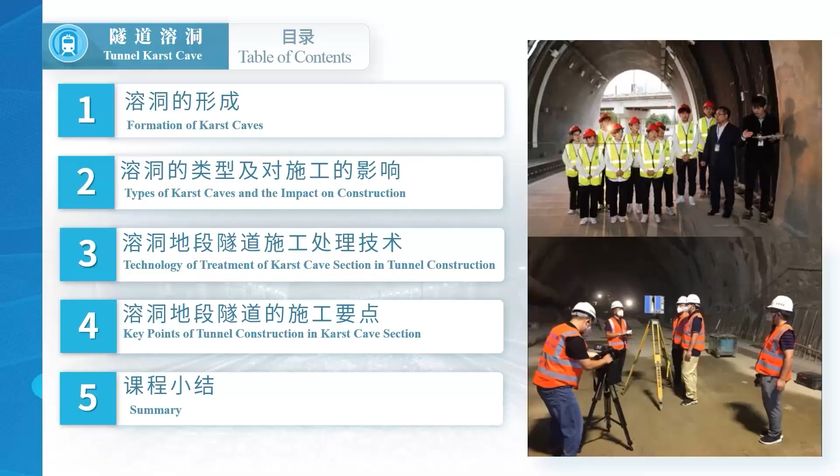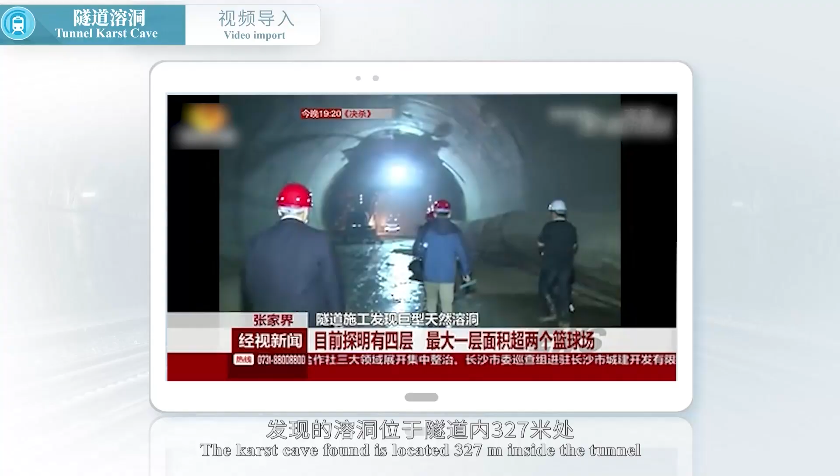A few days ago, on the Zhangjiajie-Sangzhi Expressway in Zhangjiajie City, a natural giant karst cave was found during the construction of the Huangxiangwan Tunnel in the Sangzhi section. Four layers have been proved so far, the largest of which is larger than 2 basketball courts. At present, the construction of the left tunnel has been suspended for an all-round survey. The karst cave found is located 327 m inside the tunnel, between the left and right tunnels.

When the reporter passed through the narrow mouth and reached the first layer of the karst cave, in the company of construction team workers, it seemed that they entered a large auditorium. The rock walls around are covered with large and small stalactites, most of which are covered with a layer of soil. The karst cave has several layers. This place is in the first layer, and there is a second layer inside. The karst caves are connected layer by layer.

The construction team only set up a simple searchlight at the first layer of the karst cave. Going deeper, they can only move forward with a flashlight, because the aisles of the second and third layers are narrow and the outer cliffs are bottomless. The equipment they brought could not support the shooting, and everyone went directly to the 4th layer of the karst cave. Now we are standing on the 4th layer.

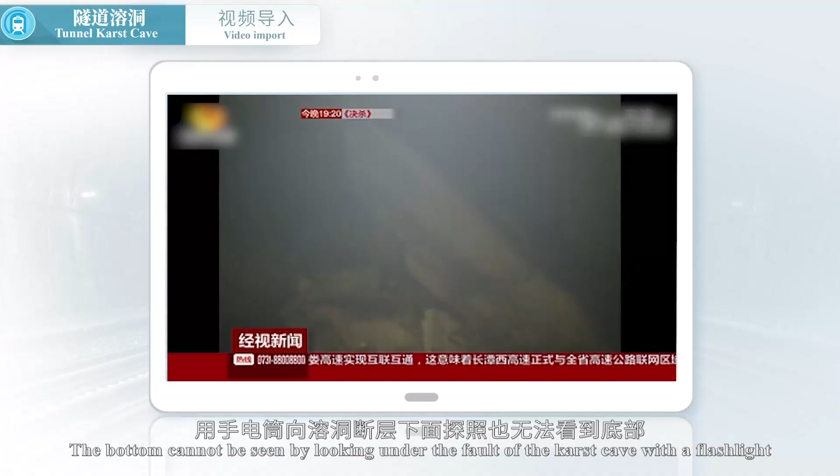The area behind me is about the size of 2 basketball courts, but the depth is still unknown due to the insufficient light. The 4th layer of the karst cave is foggy and the visibility is extremely low. The bottom cannot be seen by looking under the fault of the karst cave with a flashlight. The 4th layer of the karst cave is also the last layer explored at present.

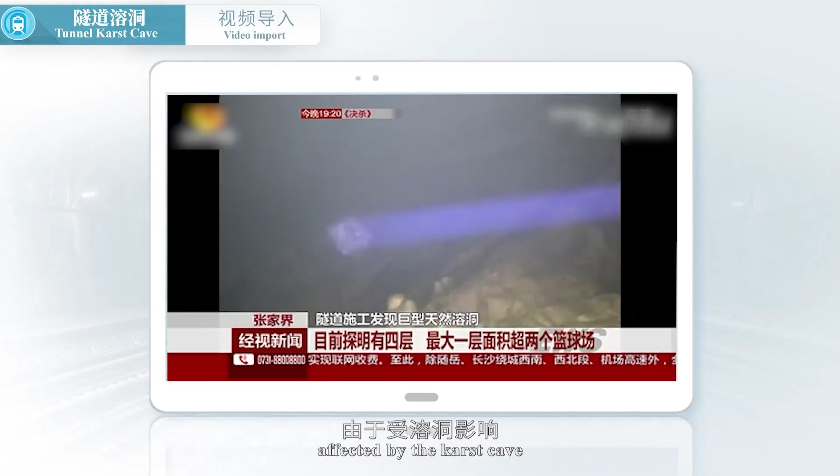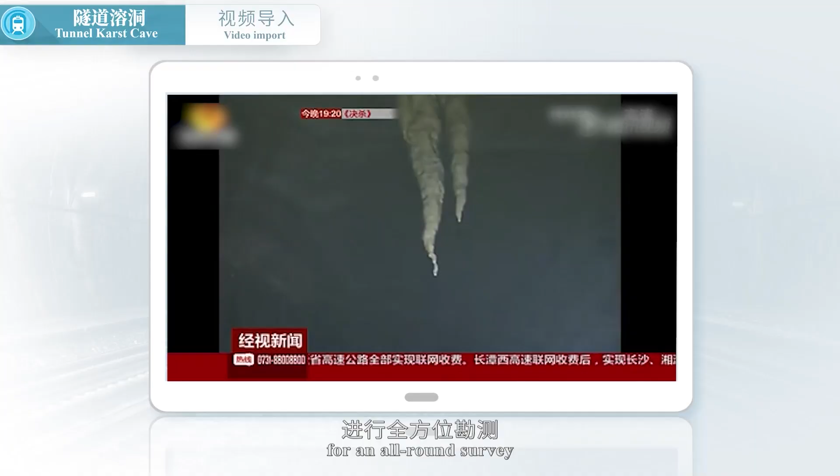According to the head of the engineering headquarters affected by the karst cave, the construction of the left tunnel of the Huangxiangwan Tunnel project has been suspended, and it is planned to contact the professional geological survey team for an all-round survey, reported by Zhangjiajie TV.

Through the video, we know that the large karst cave is large in volume. Karst caves encountered during tunnel excavation will bring great potential safety hazards to personnel and equipment, and seriously affect the construction progress. Next, let's learn about the mystery of the karst cave.

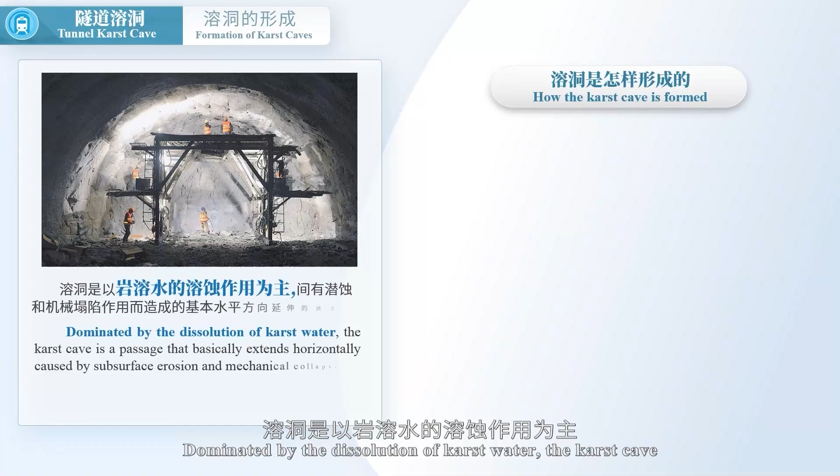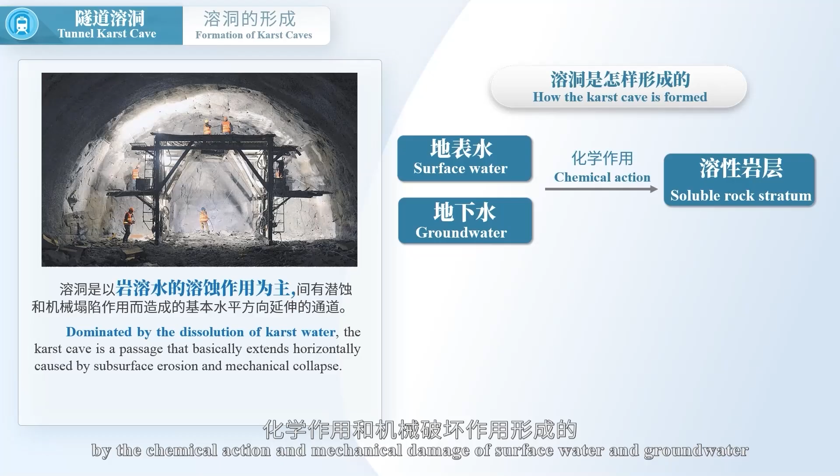First of all, let's learn how the karst cave is formed. Dominated by the dissolution of karst water, the karst cave is a passage that basically extends horizontally caused by subsurface erosion and mechanical collapse. The karst cave is a kind of karst phenomenon. The karst is an underground dissolution phenomenon formed by the chemical action and mechanical damage of surface water and groundwater to the soluble rock stratum. The different karst develops into different karst caves and fractures.

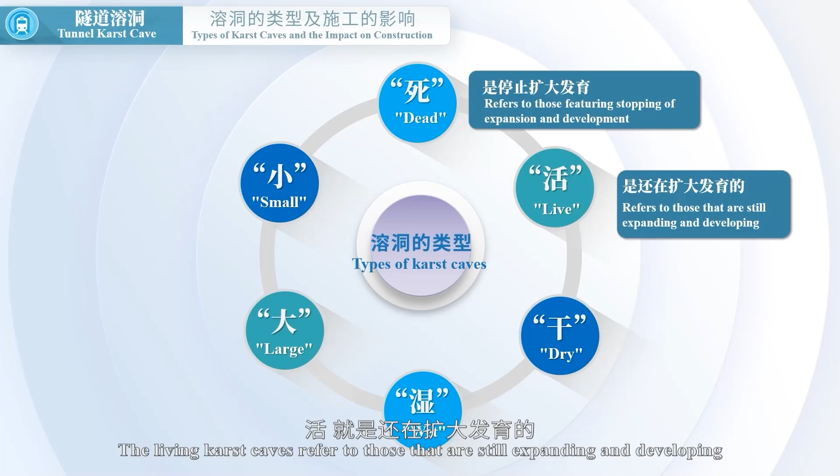Karst caves generally include the dead karst cave, living karst cave, dry karst cave, wet karst cave, large karst cave and small karst cave. The dead karst caves refer to those that stop expanding and developing. The living karst caves refer to those that are still expanding and developing. The dry karst caves refer to those without karst water.

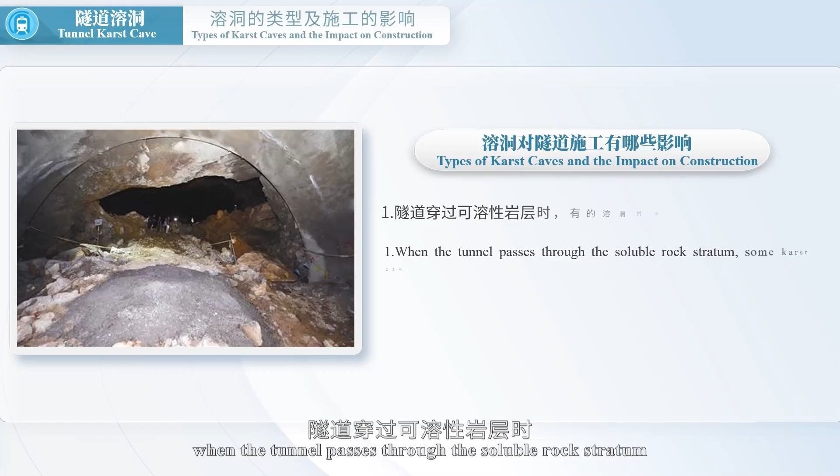What are the impacts of karst caves on tunnel construction? First, when the tunnel passes through the soluble rock stratum, some karst caves are broken with the rocks and are prone to collapse. Second, the karst cave is located at the bottom of the tunnel and the fillings are soft and deep, which makes it difficult to treat the tunnel foundation base.

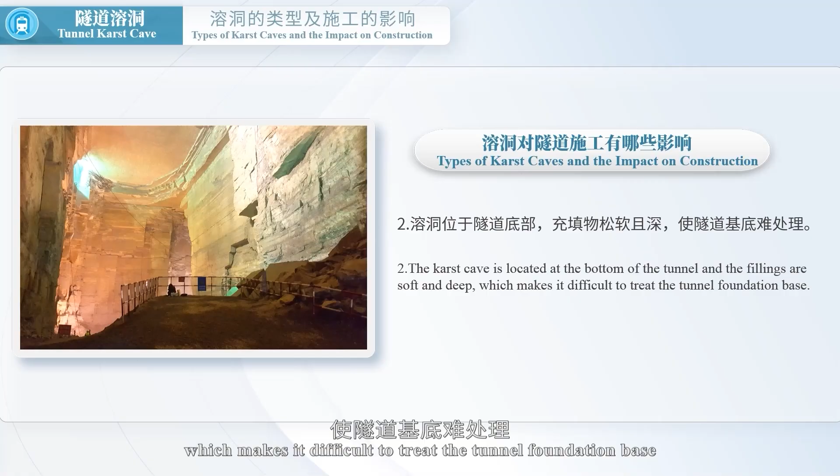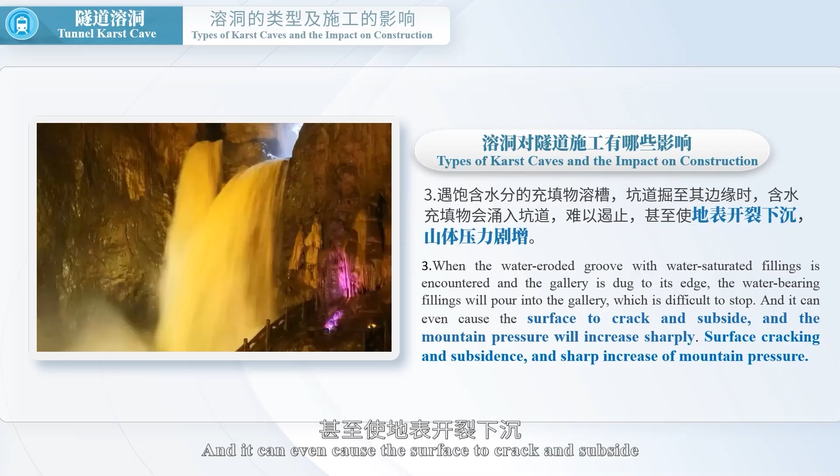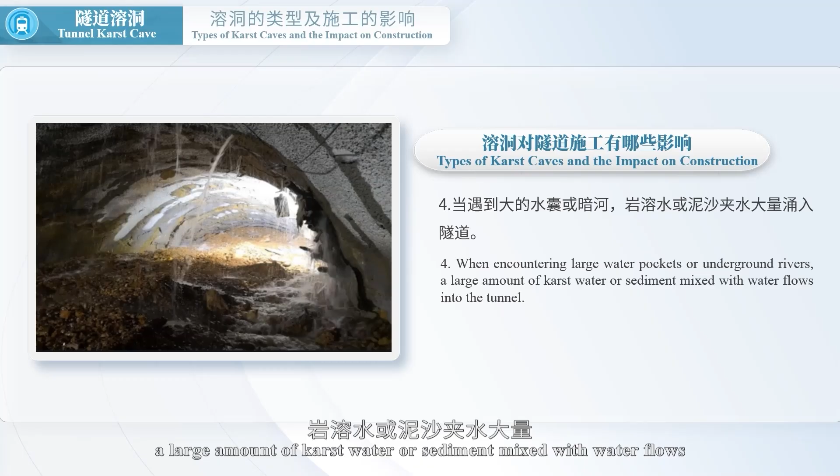In addition, when the water-eroded groove with water-saturated fillings is encountered and the gallery is dug to its edge, the water-bearing fillings will pour into the gallery, which is difficult to stop, and it can even cause the surface to crack and subside, and the mountain pressure will increase sharply. When encountering large water pockets or underground rivers, a large amount of karst water or sediment mixed with water flows into the tunnel.

Since karst caves do such serious harm to tunnels, how should we treat the karst cave tunnel?

First, when the tunnel passes through the karst area, the distribution range and type of karst caves, the integrity and stability of rock stratum, fillings and groundwater conditions shall be ascertained, so as to determine the construction method.

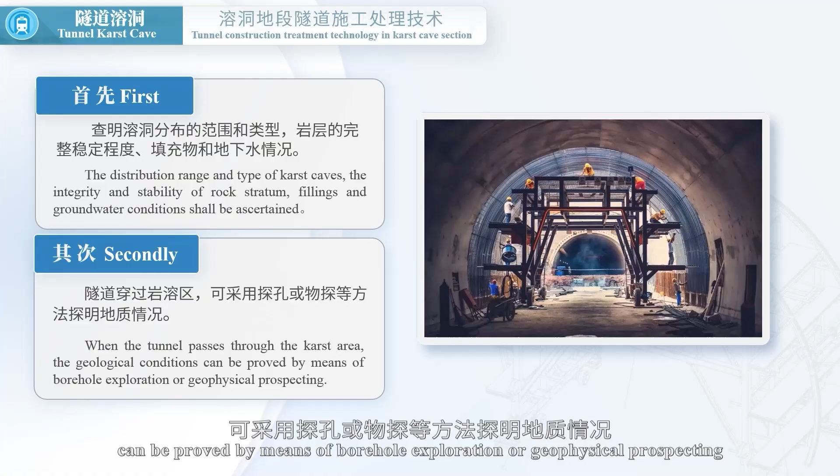Secondly, when the tunnel passes through the karst area, the geological conditions can be proved by means of borehole exploration or geophysical prospecting. Common methods for tunnels passing through karst sections include diversion and drainage, blocking, crossing, bypassing.

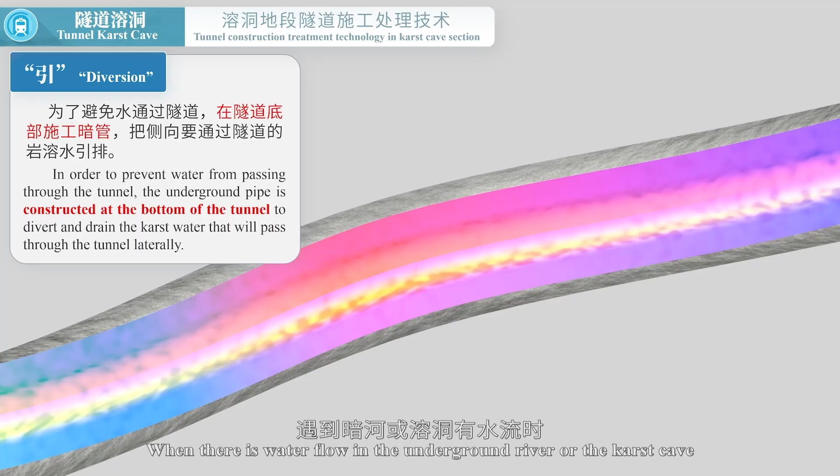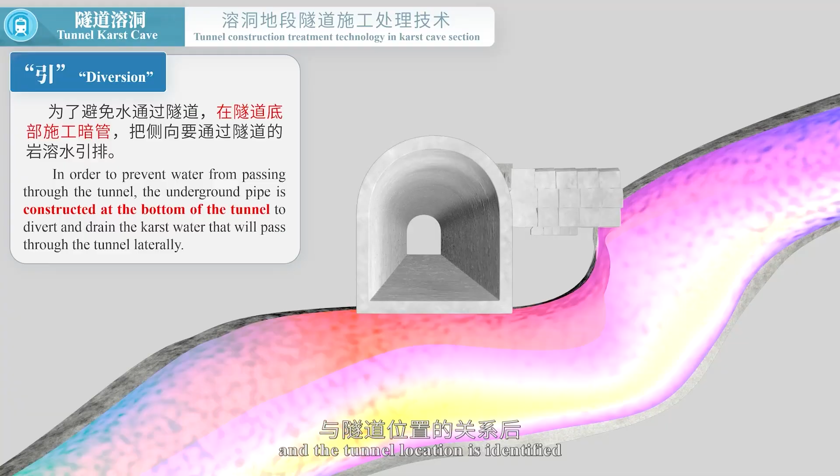Diversion. When there is water flow in the underground river or the karst cave, the drainage will be more reasonable than blocking. After the relationship between the flow direction of water and the tunnel location is identified, such facilities as underground pipes, culverts and small bridges shall be used to drain the water, or dig the drain tunnel to drain water out of the tunnel.

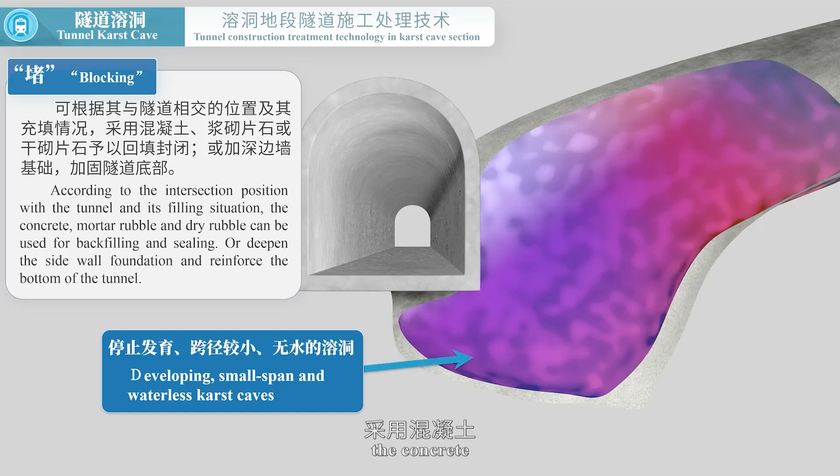Blocking. As for non-developing, small span and waterless karst caves, according to the intersection position with the tunnel and its filling situation, the concrete, mortar rubble and dry rubble can be used for backfilling and sealing, or deepen the side wall foundation and reinforce the bottom of the tunnel.

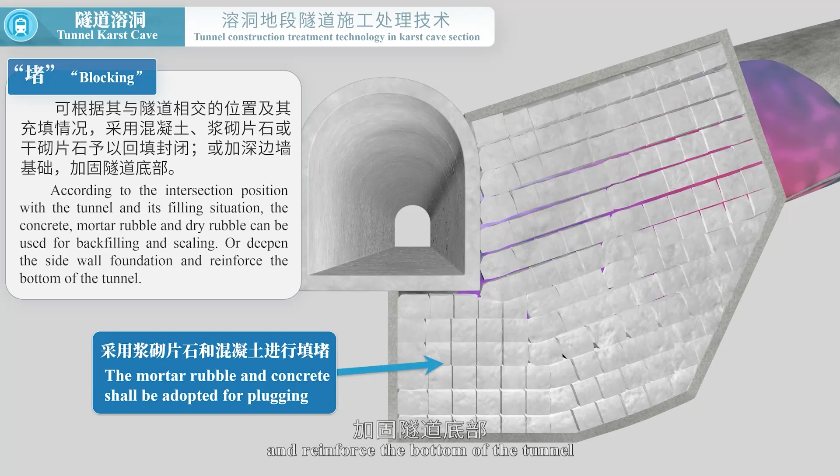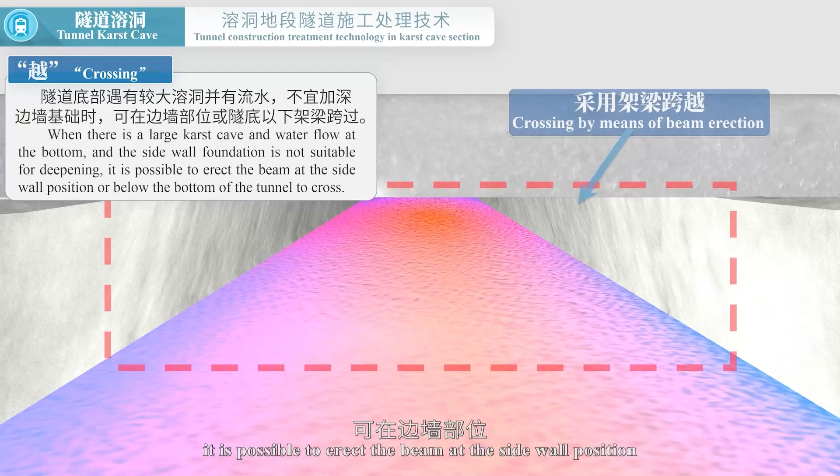Crossing. When there is a large karst cave and water flow at the bottom, and the side wall foundation is not suitable for deepening, it is possible to erect the beam at the side wall position, or below the bottom of the tunnel to cross.

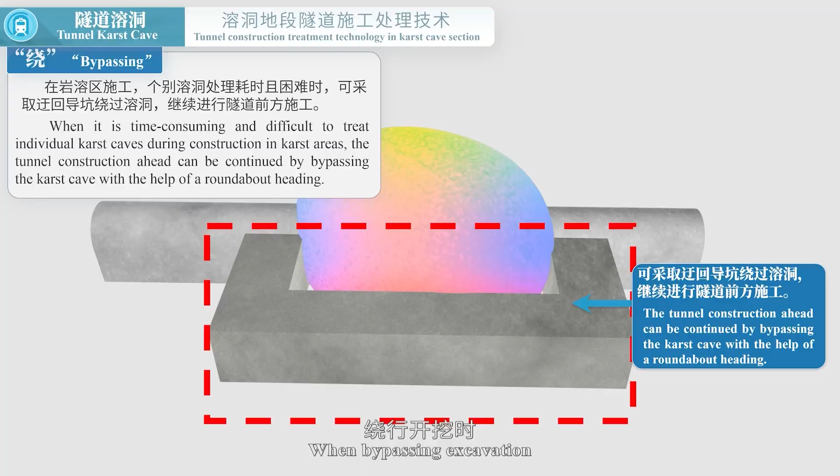Bypassing. When it is time-consuming and difficult to treat individual karst caves during construction in karst areas, the tunnel construction ahead can be continued by bypassing the karst cave with the help of a roundabout heading. The karst caves shall be treated at the same time to save time and speed up the construction progress. When bypassing excavation, the tunnel wall shall be prevented from instability.

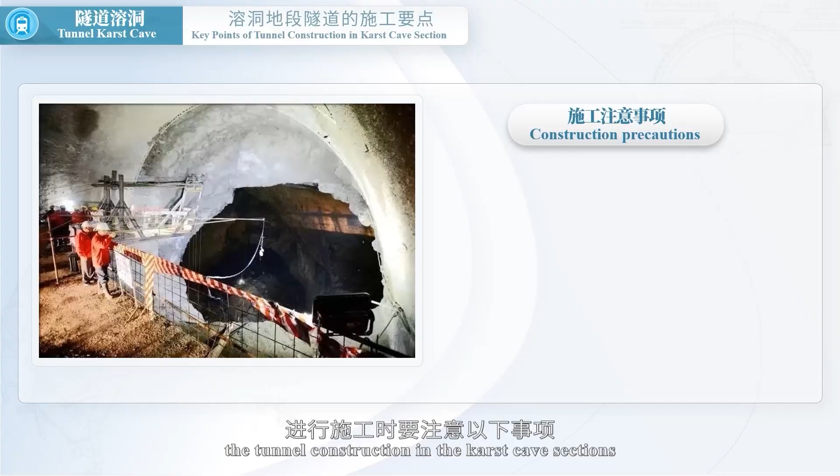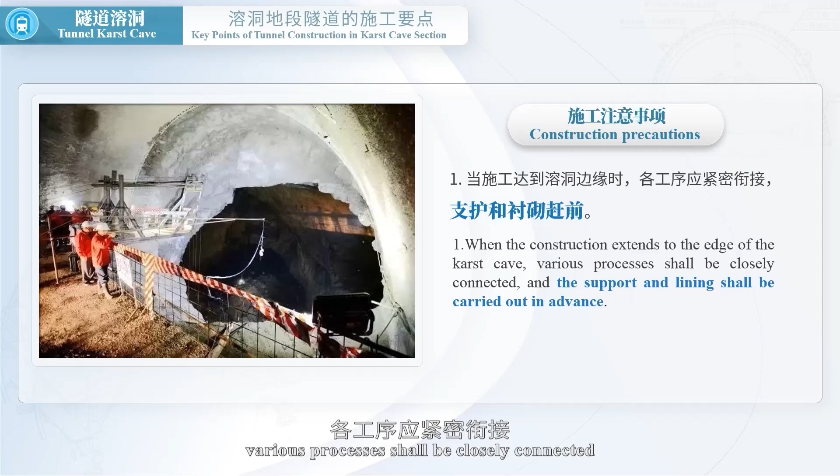In order to avoid the occurrence of hazards, we should pay attention to the following matters during the tunnel construction in the karst cave sections. First, when the construction extends to the edge of the karst cave, various processes shall be closely connected, and the support and lining shall be carried out in advance. Second, it is necessary to strengthen inspection for the top of the karst cave and handle dangerous stones timely.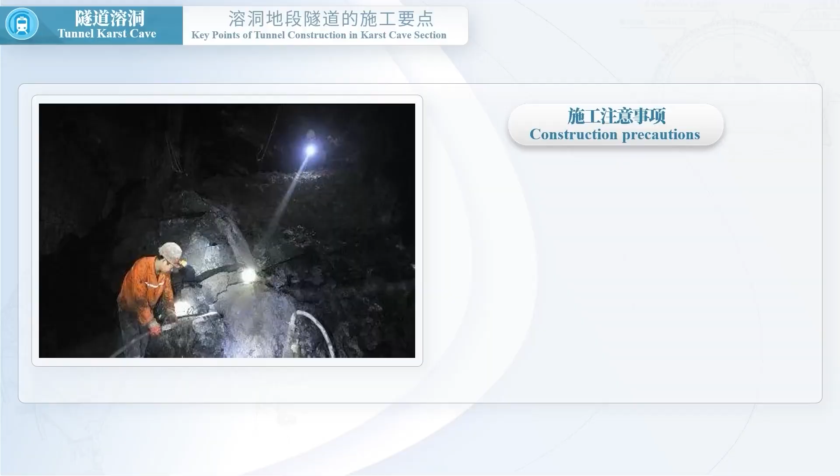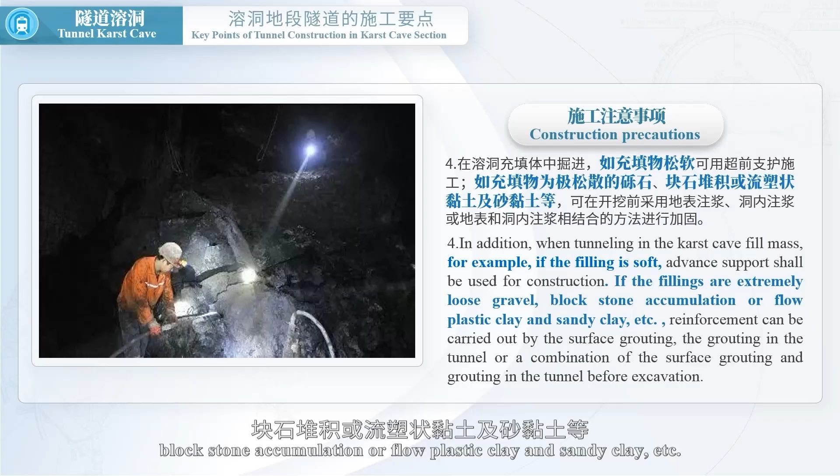In addition, when tunneling in the karst cave fill mass, for example, if the filling is soft, advance support shall be used for construction. If the fillings are extremely loose gravel, block stone accumulation or flow plastic clay and sandy clay, etc., reinforcement can be carried out by the surface grouting, the grouting in the tunnel, or a combination of the surface grouting and grouting in the tunnel before excavation. Above all, before implementing any treatment scheme for the karst cave, do not pour the muck randomly into the karst cave.

When karst is encountered during tunnel construction, safety accidents such as collapse of the dissolution fracture zone are prone to occur. The suspension of the tunnel foundation, the gush of saturated fillings in local karst caves to block the tunnel, and the incessant gush of a large amount of karst water all year round and other defects bring great difficulties to tunnel construction and affect the construction progress.

In order to ensure construction safety, it is necessary to strengthen investigation, carry out dynamic design and risk assessment of karst tunnels, strengthen drainage, strengthen grouting, strengthen support and other emergency measures, so as to eliminate hidden dangers of the tunnel and ensure the safety of people's lives and property.